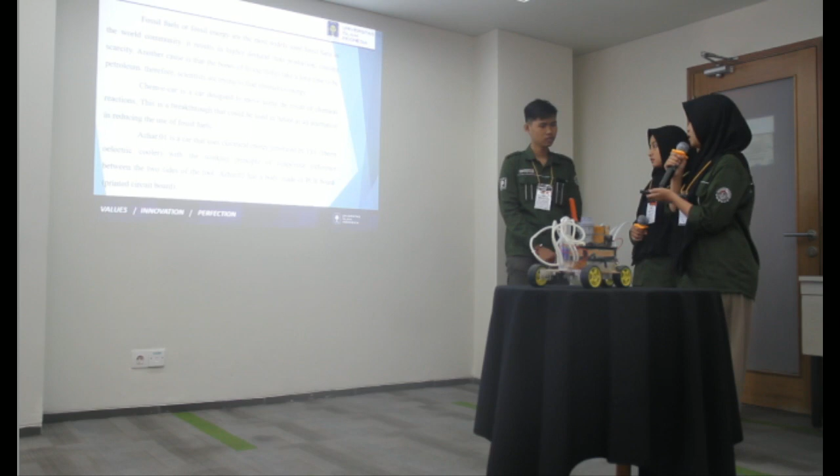Fossil fuels or fossil energy are the most widely used energy sources in the world community. This results in higher demand in production, causing scarcity. A chemical car is designed to move using the result of a chemical reaction. This could be used in the future as an alternative, reducing the use of fossil fuels.

Azhar 01 is a car that uses electrical energy generated by DC, with the working principle of temperature difference between the two sides of the tube. Azhar 01 has a body made of PCB board.

Assembly process: first, looking for the energy source; second, measuring the amount of energy; third, determining the DC motors used; fourth...

Next, my friend Farida would like to explain the body of the car. Okay, thank you. This is part of our car.

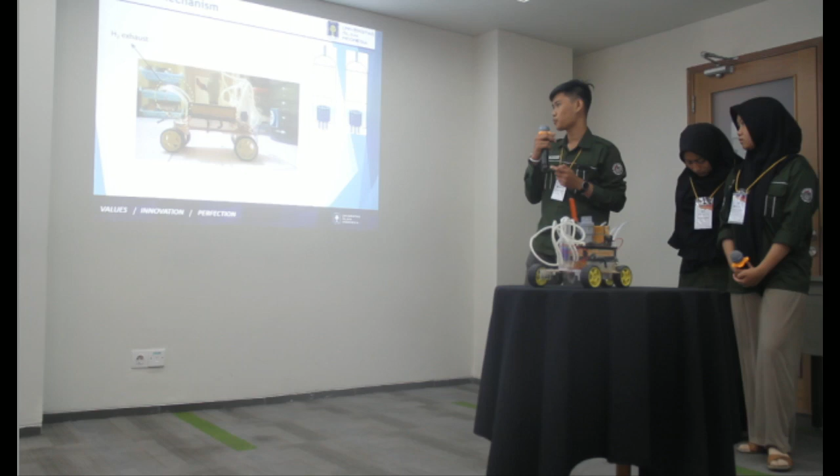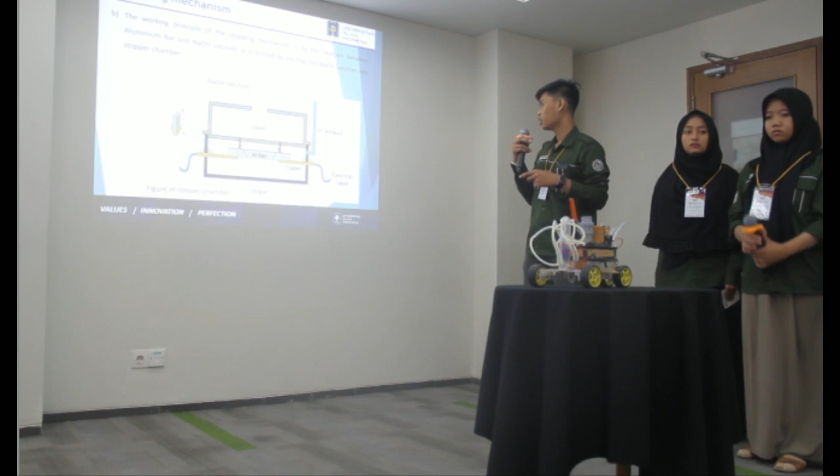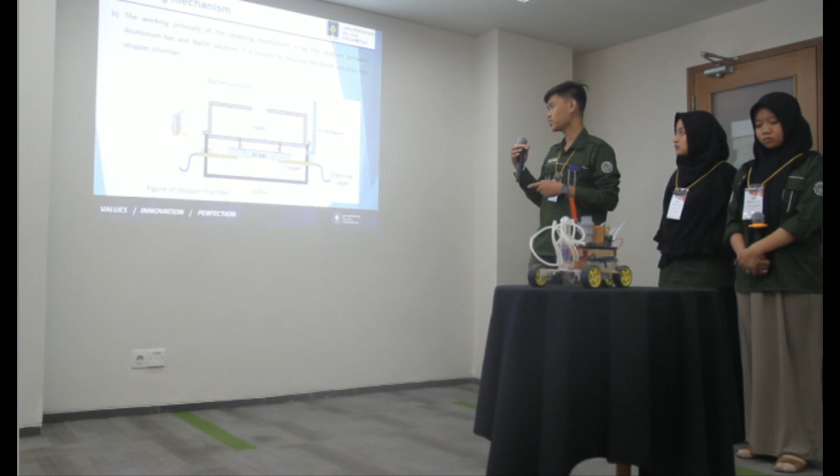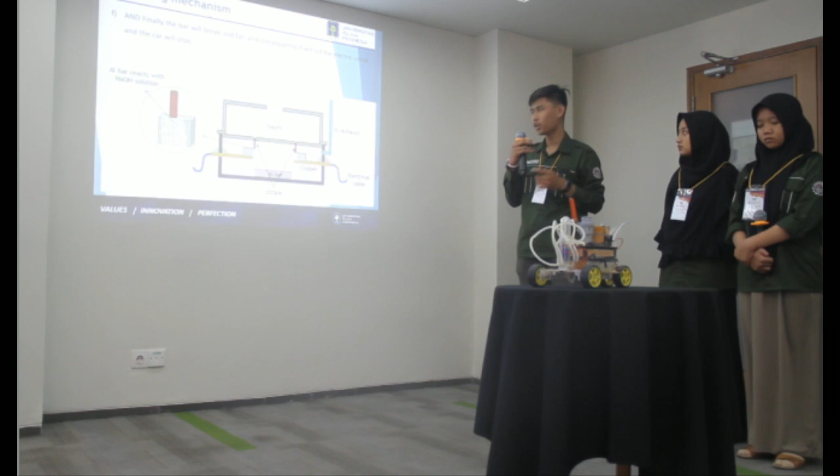In the stopping mechanism, there are two parts. One part is for the sodium hydroxide solution tank, and at the bottom is the aluminum bar. The working principle of the stopping mechanism: the aluminum bar reacts with the NaOH, sodium hydroxide, degrading the aluminum bar, and finally the bar breaks and falls, cutting the electrical circuit so the car stops.

Ya, prosesnya di alat ini di mobil ini seperti apa? Bisa keluarnya gas H2 tadi. Gas H2-nya itu keluar dari sini dan di dalam sini ada heatsink. Bisa dibalikkan di sini biar saya bisa melihatnya. Oke.

Pada saat proses itu terjadi pastinya tahu dong. Flammability yang terjadi itu ketika gas hidrogennya ini, kami membuat exhaust-nya agak panjang ke atas agar distance-nya jauh.

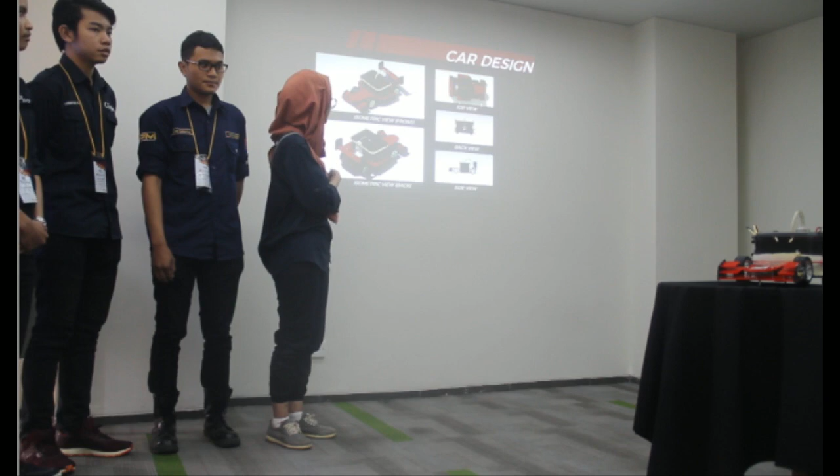Before we start, I would like to ask you one question: have you ever heard about the Seebeck Peltier effect? The Peltier effect is the process of heating or cooling from two different conductors. Meanwhile, the Seebeck effect is the conversion of heat directly into electricity within two different wires. Why is this effect important? Because these two effects are linked to the thermoelectrical system that we use in our car.

So we start from our car design. As you can see, our car design is based on the F1 car design. We followed it very detailedly. You can see many similarities for the rear wing, the front wing, the body also, and the wheel. And this part is our reactor, this is where we put the reaction for the power source. This side is our stopping mechanism bottle, and we put the electrical side under the spoiler.

For our car concept, this consists of three important parts: the chemical parts, electrical parts, and mechanical parts.

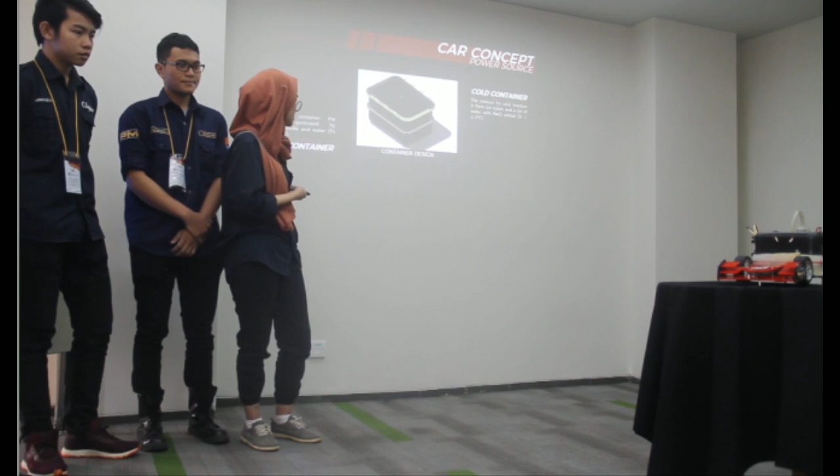This is our sketch for our container design. It consists of two parts: the cold container, where we put the ice and a bit of water with sodium chloride, and the lower part, which is a heat container. This is the place where we put the calcium oxide and water reaction, and the reaction can be seen like this.

Our stopping mechanism uses the reaction between aluminum and sodium hydroxide, which produces a black color, but in the form of a dissolved suspension. We use a photodiode sensor, and the reaction for the stopping mechanism can be seen like this.

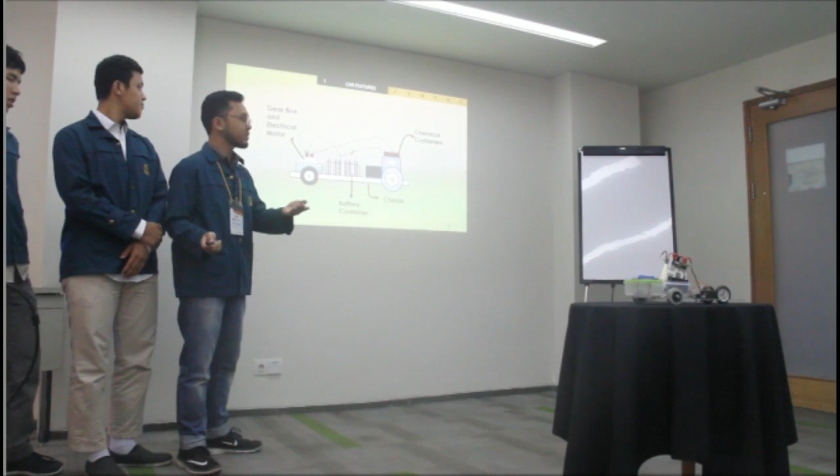So first, let us introduce our little friend here. Our car power source comes from the electrochemical reaction. The reaction comes from the aluminum and air battery. What actually makes our car unique? Our car is simple.

And I want to introduce you to our main feature. There are gearbox and electrical motor at the front side, and there are chemical container at the back side. There are also battery container, then chassis, and then the Arduino.

The construction process starts by the cutting of the chassis. The chassis was made from the acrylic, and its size is 34 by 22 centimeters. Then we choose polypropylene as our material for the battery containers.

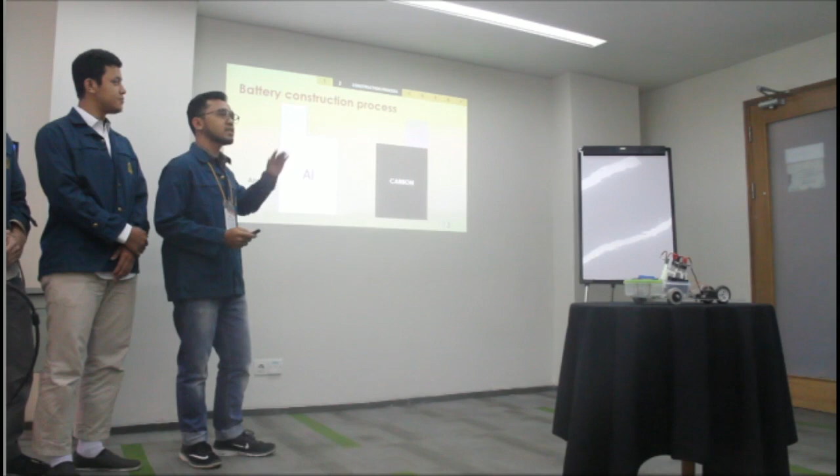The battery container is not closed to ensure there is sufficient oxygen for the reaction in the battery. Why we choose polypropylene? Because polypropylene is easily found in the kitchen as any container, and its ability to handle strong acid and base, and then it is easy to make from the used container.

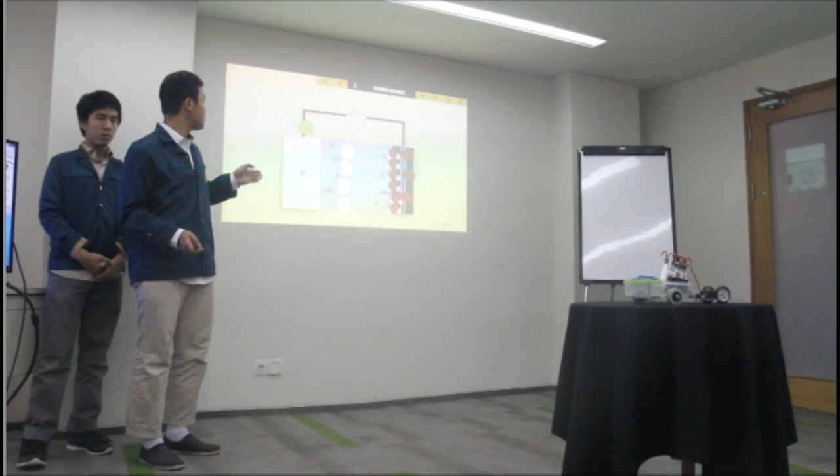Battery construction process is started by cutting the aluminum into plates. The aluminum will act as the anode. And for the cathode, we use the carbon collector as the base, and we spread carbon all over both sides of the carbon collector, and we'll cover it with tissue membrane, and we'll clip it by one. And it's the front view of our battery, and this one is the side.

So this is our power source, aluminum carbon reaction. In anode, aluminum will be oxidized, and in cathode, oxygen will be reduced.

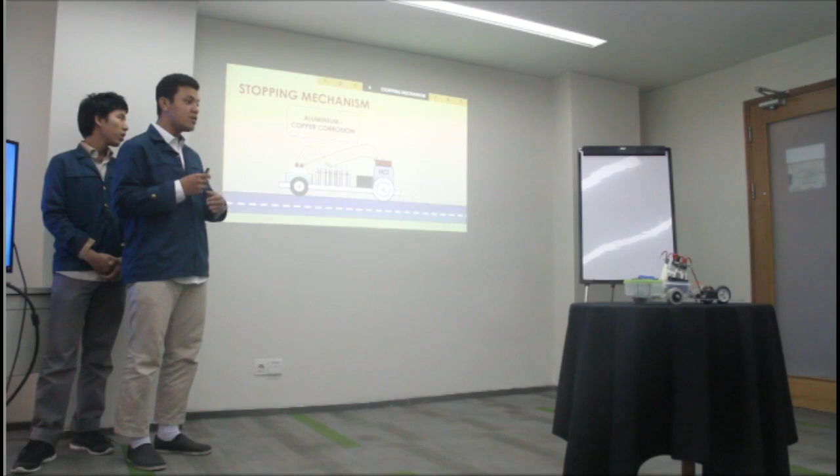This is our power source liquid with potassium hydroxide solution in this membrane. Aluminum will be oxidized to aluminum ion releasing 12 electrons, and 12 electrons will react with oxygen to form hydroxide ion, and hydroxide ion will react with aluminum to become aluminum hydroxide layer on the surface of aluminum. Aluminum hydroxide will slow down the oxidation reaction. This is our reaction with potential reaction 2.064.

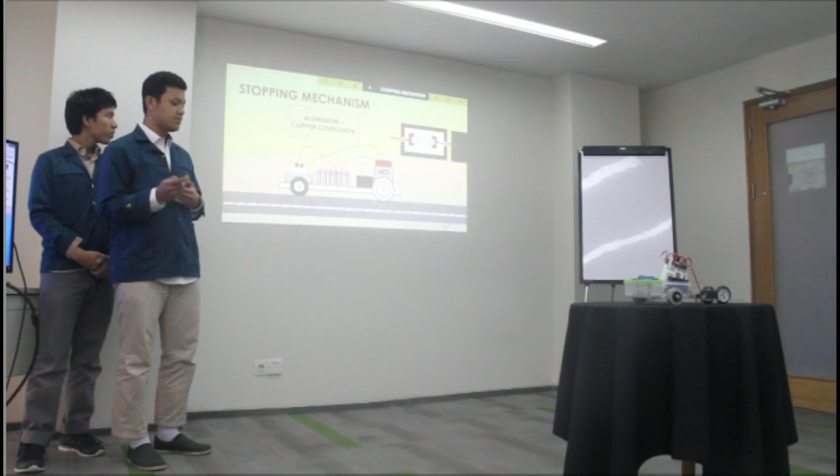Okay, this is our stopping mechanism. Our stopping mechanism starts with hydrochloric solution, and aluminum copper corrosion. Aluminum will react with hydrochloric solution when the aluminum is dissolved with hydrochloric solution, and then Arduino will cut the current to the dynamo.

Not only simple, our equipment is eco-friendly. Our battery will be made from waste material like waste aluminum container and foil, and from carbon active from carbon for aquarium and UV resin. And our car is safe because our waste is just potassium hydroxide and hydrochloric solution, and these materials neutralize each other.

Okay, and then this is the economic aspect, and this is the capital expenditure, and here are all the materials that are needed to create our car, and this is the total cost. It will be 125,000, and then sorry.

So we can also use waste material for our car, such as the carbon and the aluminum for the waste. By doing so, we will reduce the total cost by almost 20%, and it will be just 103,000 rupiah.